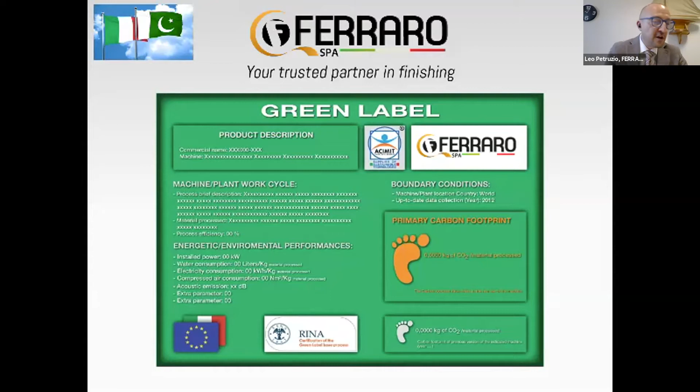Green label, this is related to the sustainable technology, and each of our machines is equipped with this label, which is stuck on the machine, and it reproduces the exact consumption of the utilities of the machine. And this label is certified by an international certification organization, which is RINA. All the data of this label are per kg of fabric. So any user of the machine can understand and calculate exactly the consumption of the machine for each kg of fabric.

We also have to take care about our quality certification. In fact, Ferraro is qualified and certified with ISO 9001, 14001, 18001. And we are very proud of this because it takes care of all our employees, the manufacturing, and the quality of the machines. Another point which is very, very important for us is the new Industry 4.0, which is the new challenge of manufacturing that includes the digitalization of all the data of the machine with the interconnection of the software in the companies.

Research and development, which is linked to the first point, which is innovation. We take a lot of care of research and development because we think we have to make continued innovation regarding the quality and the performances of the machines.

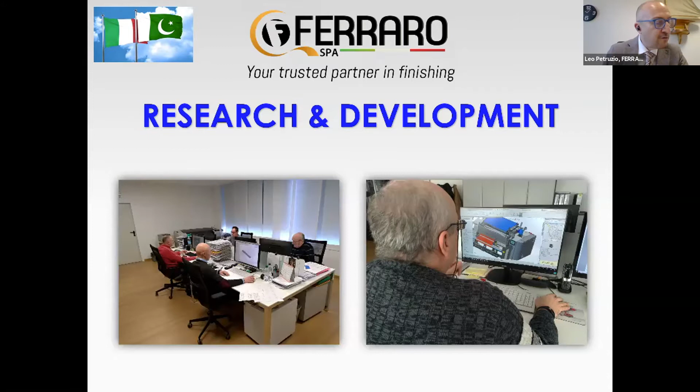The experience, this is another important point, one of the most important points, because the human capital, the human resource is the base. And you are young people, but I think that you always have to keep this in mind. The good success of a company is made mostly by human resources, by persons, by people. Any company can have all the money, all the instruments, all the tools, but without skill and good people, the company cannot grow.

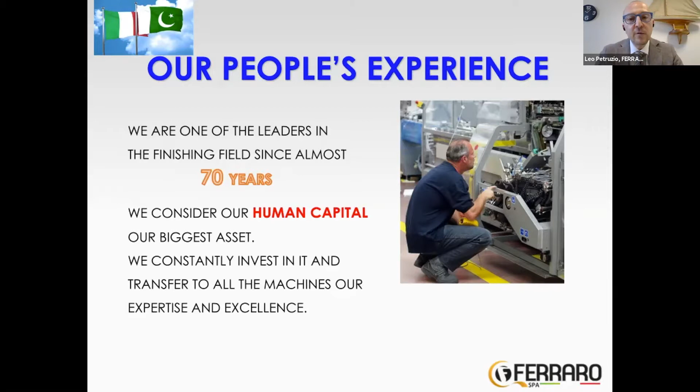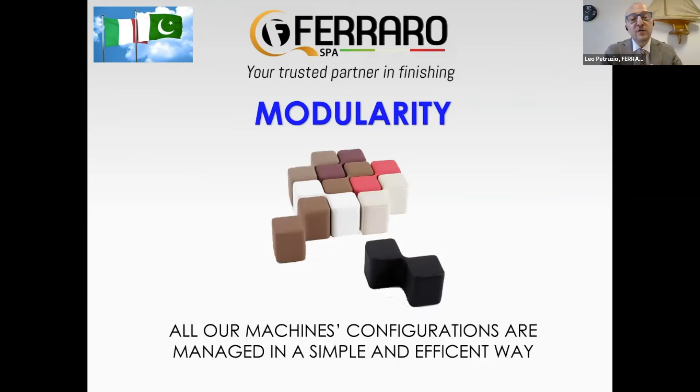Modularity, which is linked to a modern point of lean manufacturing, which is the research of production and manufacturing with high efficiency, low waste of material and of time, and better quality of the machines, but also of the life of people.

Another point which is very, very important is the after-sales service, because our target is never to leave customers unattended. This is a very important point, especially in this period of COVID, because our engineers cannot travel, or at least have a lot of restrictions in traveling. So this continuous communication between our service and customers is at the base of our success.

Our engineers team is constantly available to respond to all our customer needs. And we are also developing augmented reality software in order to let the customer attend the machine as it should be in our site.

Okay, let's start with the finishing machine. We started with the compactor, which is still our core business. The compactor is the last chain link of the textile process, because it's the last touch before making garments. The compactor gives a very good hand feel to the fabric, because the fabric is becoming a garment, and the garment has to be worn by us. And we need flexibility, we need softness, and we need also dimensional stability of the fabric, because the size we choose for our garment must be durable after a lot of washing.

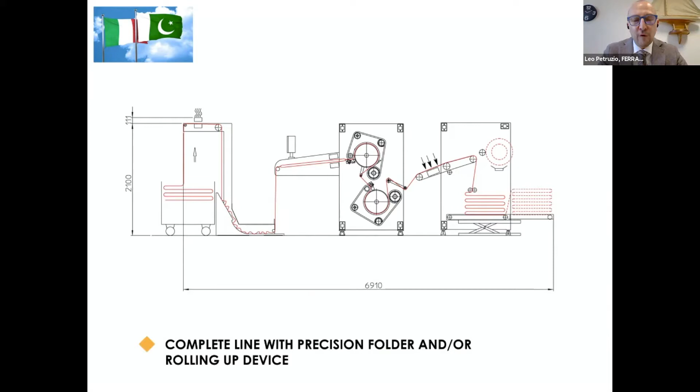An additional small module of our machine, and I would like to recall the concept of modularity, is the polishing cylinder, which you can see at the end of the compactor, that gives another effect to the fabric, which is a soft shining effect.

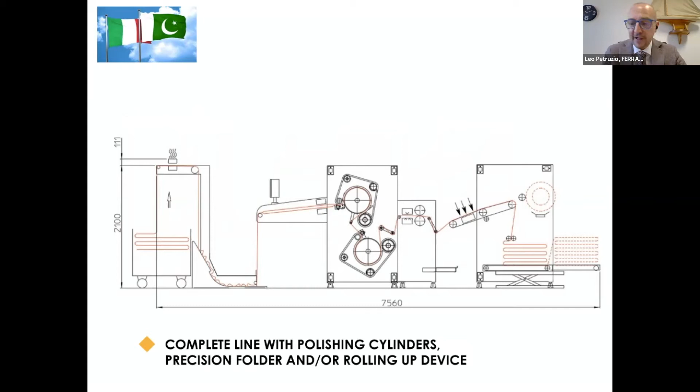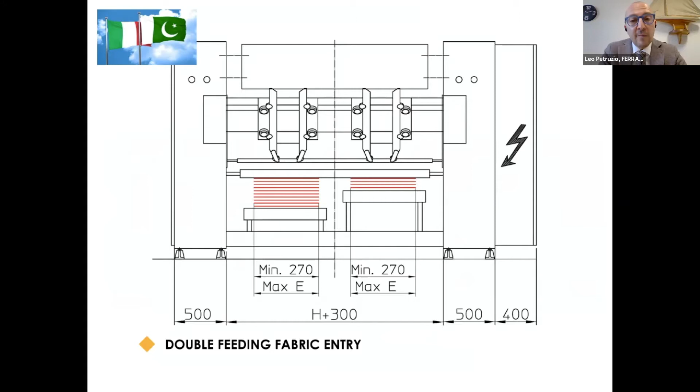We also developed a machine which works two lines of fabric completely independently. It means that in one machine we can process two different fabrics independently, and this is an efficient machine, because it can double the production with only one machine. I will show you the video of the machine.

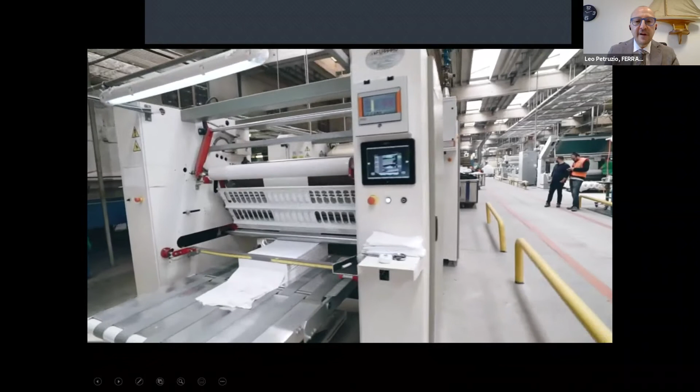This is the delivery with the precision plaiter. And this is the machine fully equipped. Spray system to humidify the fabric.

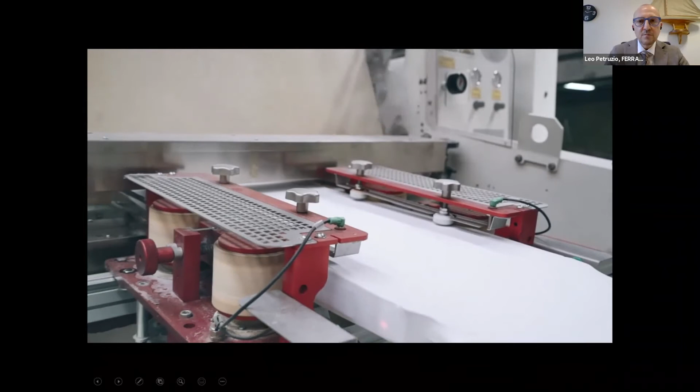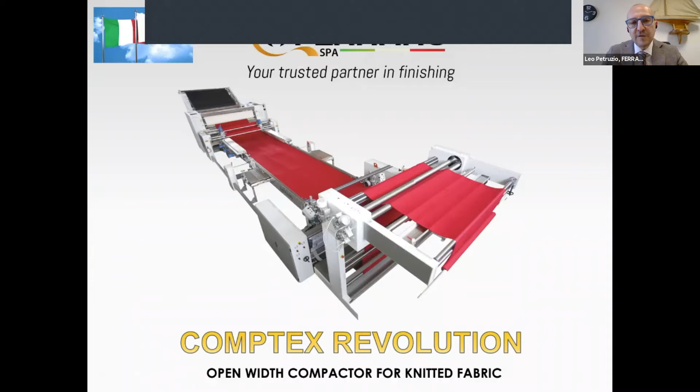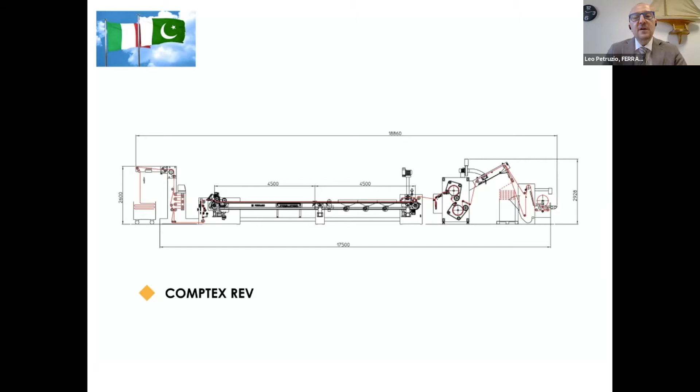Okay, the same machine is also manufactured for open width fabric. Many of our customers are not working only tubular fabric, but they slit the fabric and open it. For that reason, we also manufacture the machine for open width, which is exactly a felt compactor with all devices, including a weft straightener as an optional, and an open width compactor with the sanforizing machine between the pin chain and the felt compactor.

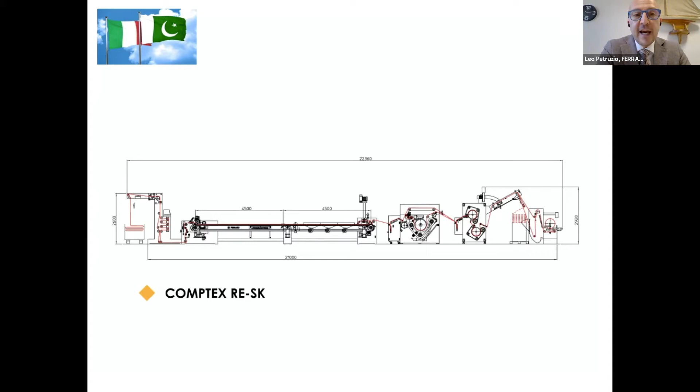This is a technology which improves the compression capability, so the stability of the fabric, and also improves a sort of silk and silicone touch effect on the fabric, which is very, very appreciated, especially on pigment printed fabric. The compactor machine, in some cases, can also be added at the exit of a stenter frame in order to have a full line of drying and compacting, calendering.

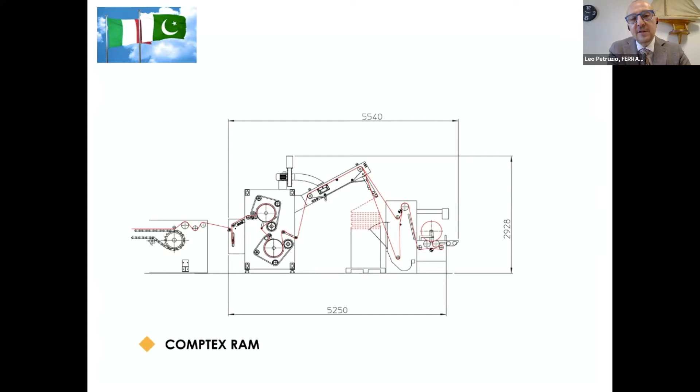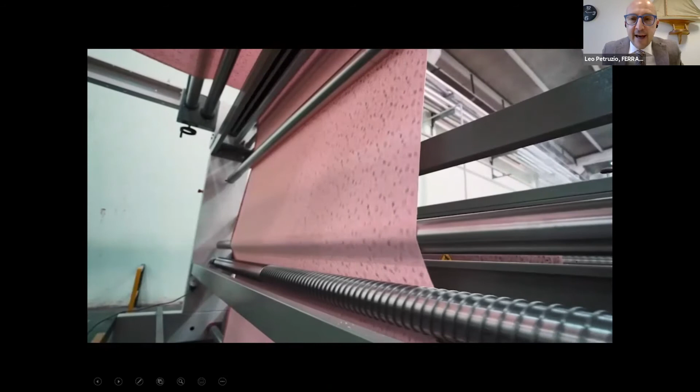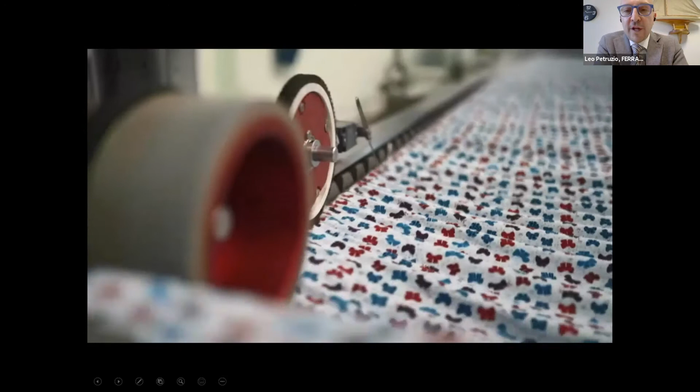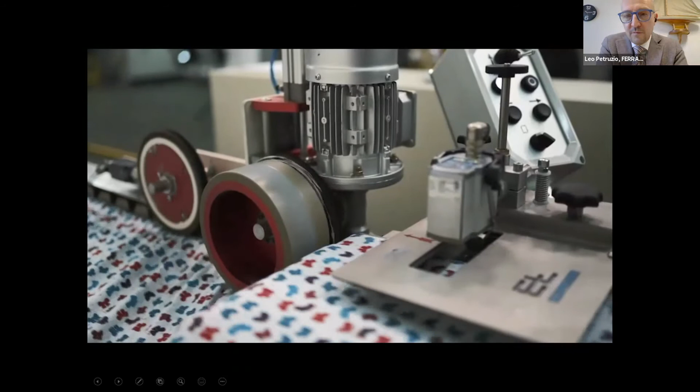This is the video of the open width compacting machine. It's a complete and complex machine. The length is about 20 meters and it has a 10-meter long pin chain, which is needed to open the fabric and stabilize exactly the size and the width of the fabric. We are using a computer which is linked to Industry 4.0, and all the data of the machine can be digitalized. This is the sanforizing machine with the rubber.

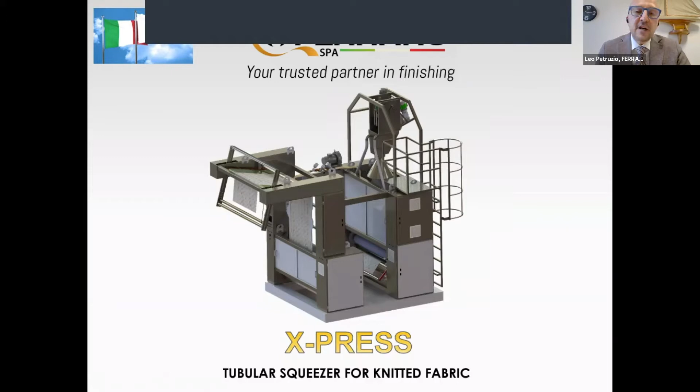Okay, for several years, in order to have good performance of a compacting machine, we started manufacturing also tubular squeezers and slitting machines, which work on wet fabric just after the dyeing machine and before dryers or stenter frames.

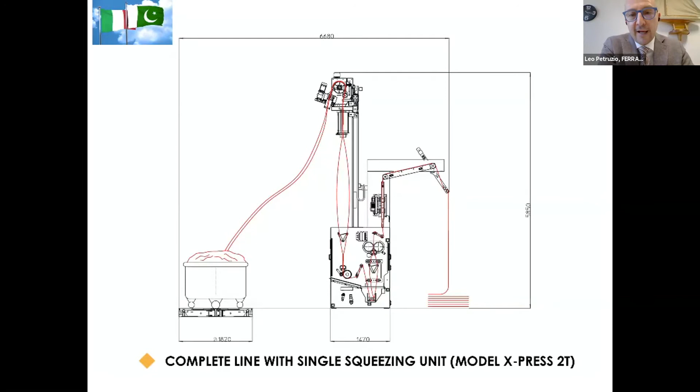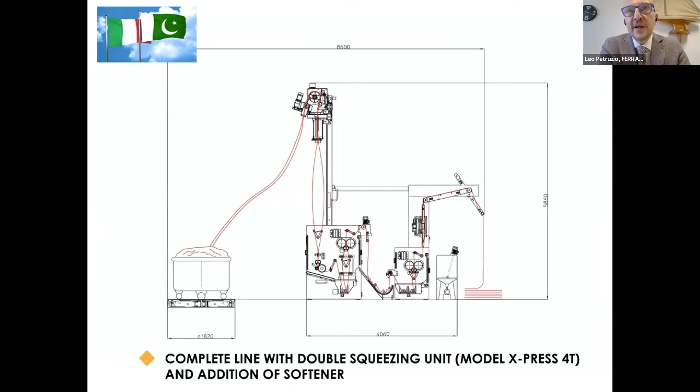This is the tubular balloon squeezer, which can be single, like this one, from the trolley of the dyed fabric, which is wet. It can be detwisted from rope to the balloon and then squeezed and opened, then plaited just to let the fabric go into the dryers. Or double, including two padders. The first one is for dewatering, and the second one is to apply the softener to the fabric.

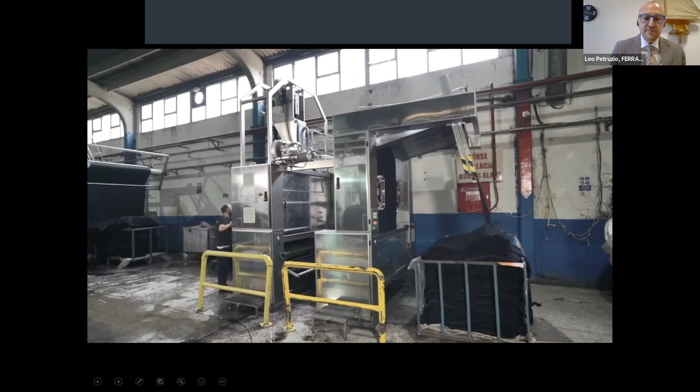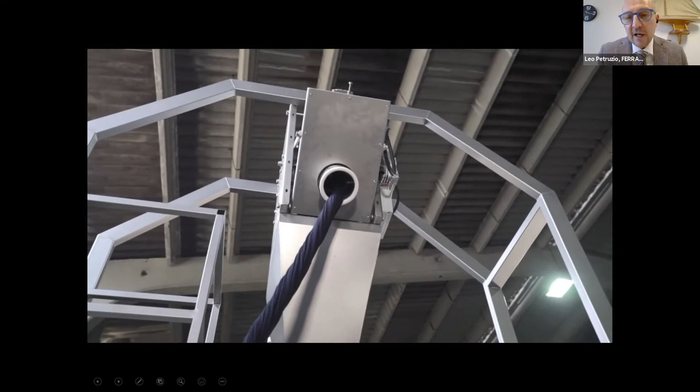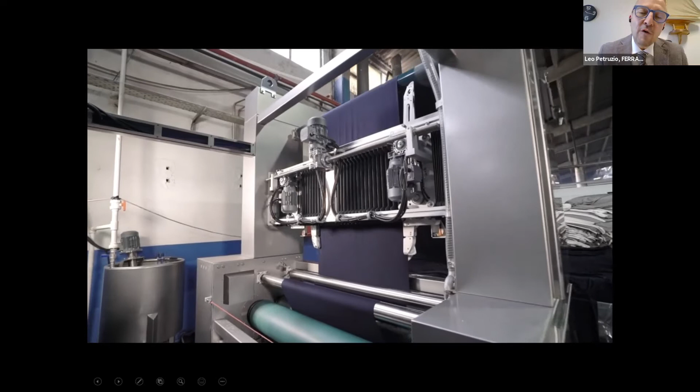This is the balloon squeezer. It is totally in stainless steel and recalls the concept of quality, because being a machine for wet fabric, we must design for durability and long life. So it is totally made of stainless steel. This is the padder, and we developed a particular rubber compound which is called Ferragum, and it gives a very strong squeezing effect, releasing only 55–60% of water.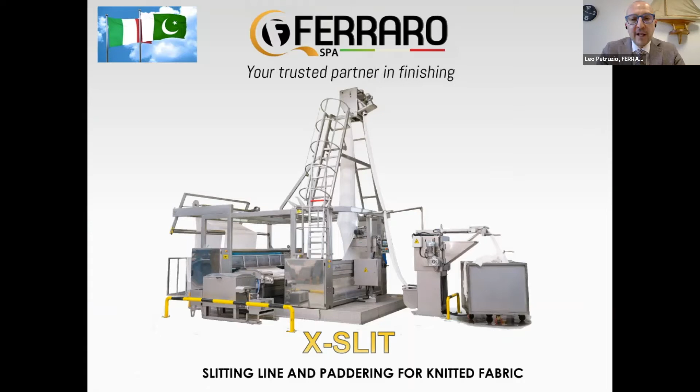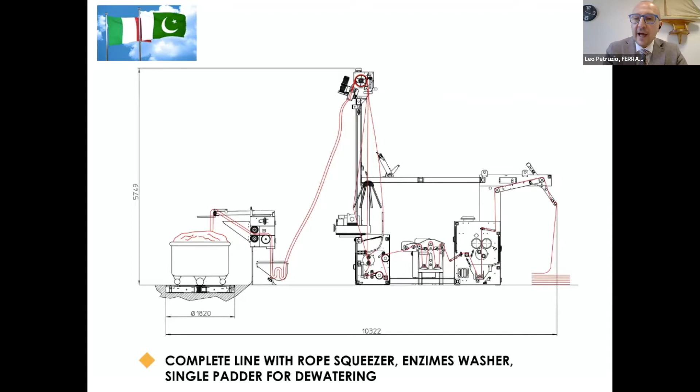The same concept applies to the slitting line, which transforms the fabric from tubular, opening and squeezing it. It is a machine with a rope squeezer, twister, opening basket with cutting, and an enzyme washing tank to remove all enzyme residual from the fabric, plus a padder to squeeze the fabric and remove the major quantity of water. This is single, but can also have two padders with the same concept as the tubular squeezer, one for dewatering and the second for softener application.

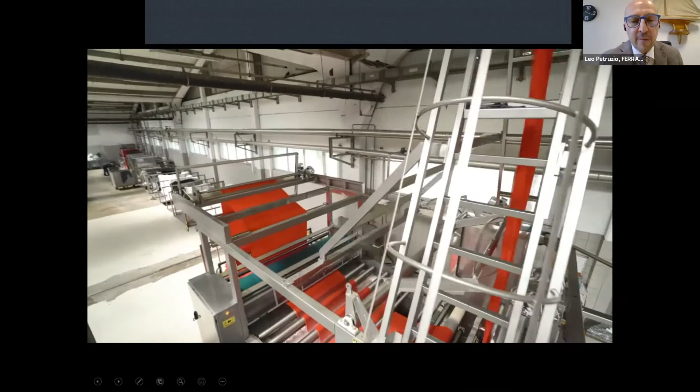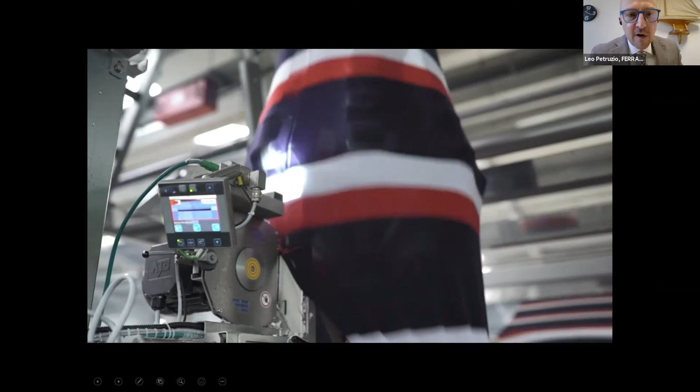I will show you a small video of the slitting line. This machine is for wet fabric, so it is totally made of stainless steel. Also in this case, the rubber compound for squeezing that we use is our patented Fair Gum technology. This is the basket to cut and open the fabric, and this is the enzyme washing machine with a filter.

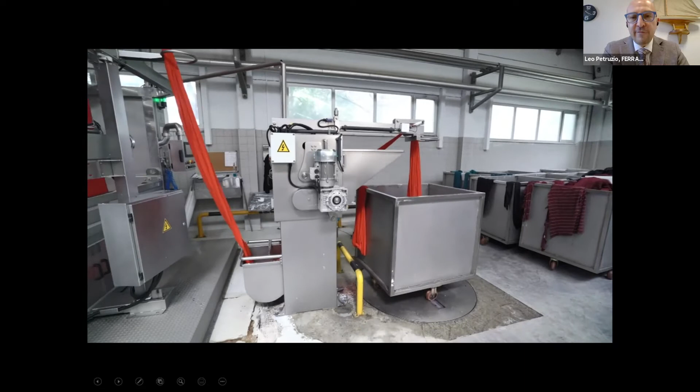The machine can also be used from rope fabric to open fabric. This is called rope opener and squeezer. This is the filter to filter the water from the residual, especially the enzyme residual, for cotton and blending.

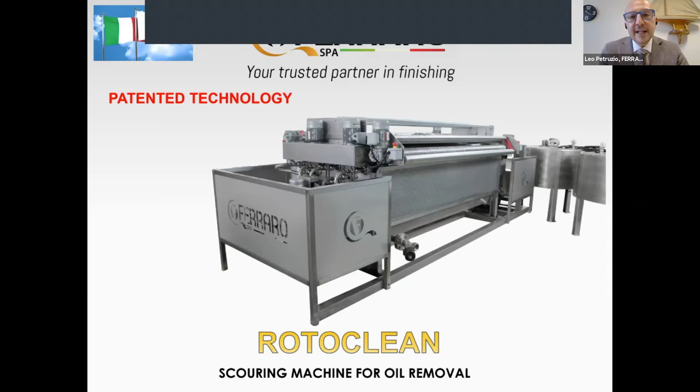Now we pass to a new technology, which is RotoClean, a scouring machine for oil removal. It started from the idea of washing the fabric and removing the oil, but without wasting water. This is again linked to sustainable technology. It is a machine linked to a stenter frame, just in the process of heat setting, removing the knitting oil from the fabric just before the heat set procedure.

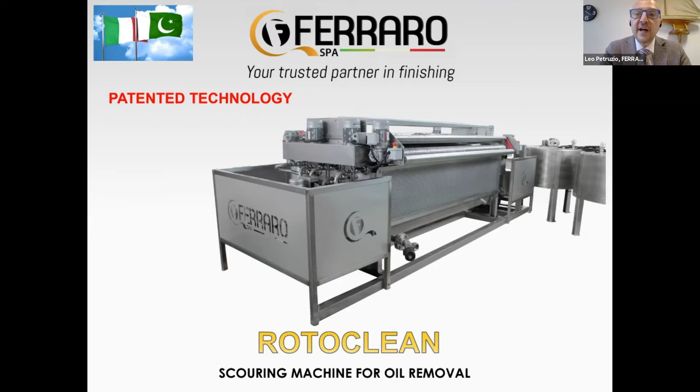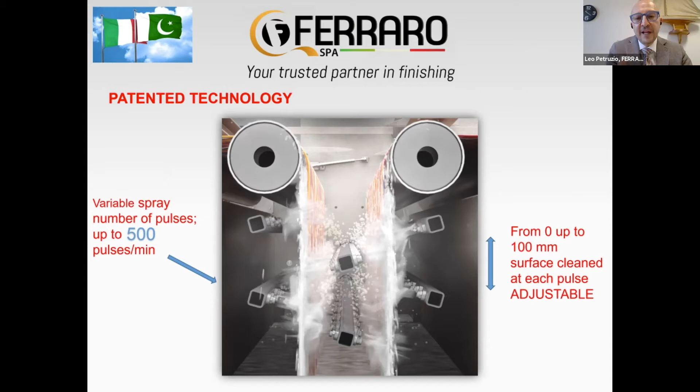It's a machine with a patented technology using vibration of nozzles, which can make 500 pulses per minute, increasing the washing efficiency and capacity 8 times compared to a fixed nozzle machine. It is linked, as mentioned, at the inlet of a stenter frame just before the foulard or padder, or in between two padders, like this one. I will show you a video which is self-explanatory about our patented pulse movement.

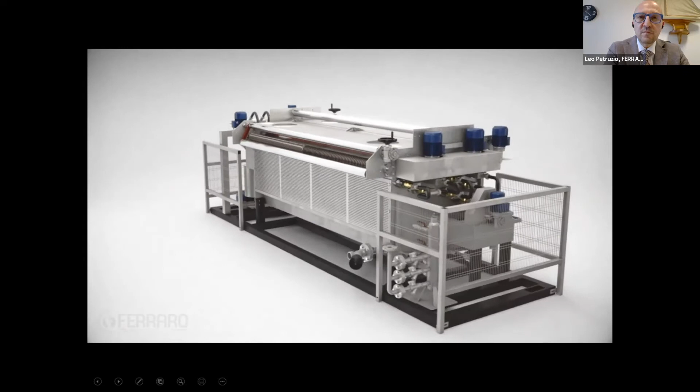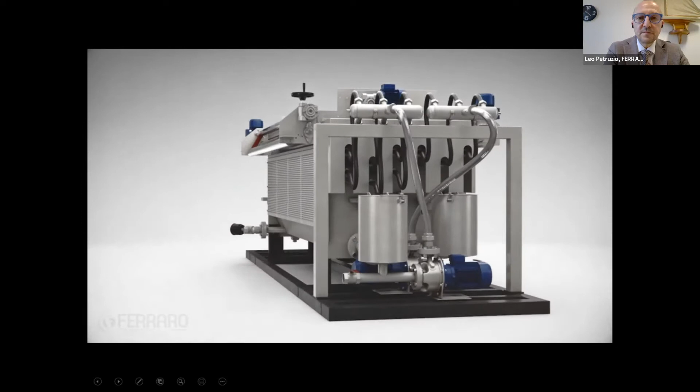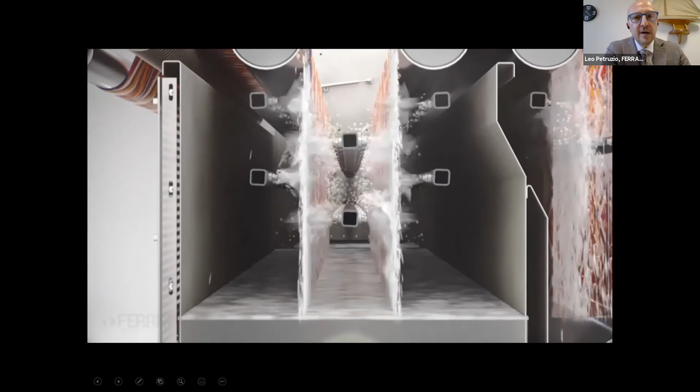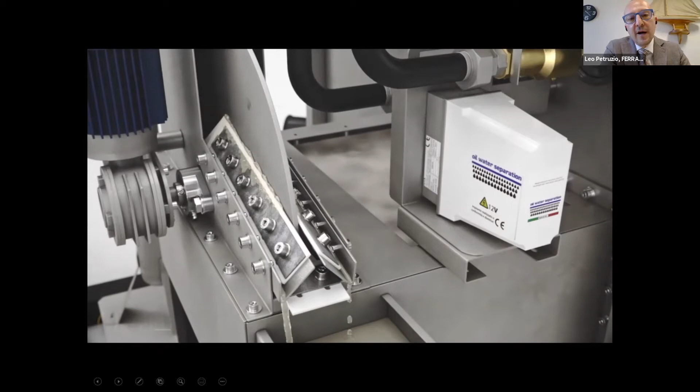The oscillation of the nozzles makes a sort of brush on the fabric with water and chemical, which is a special sustainable chemical that separates the oil from the fabric. The oil is filtered on this filter and totally separated from the water.

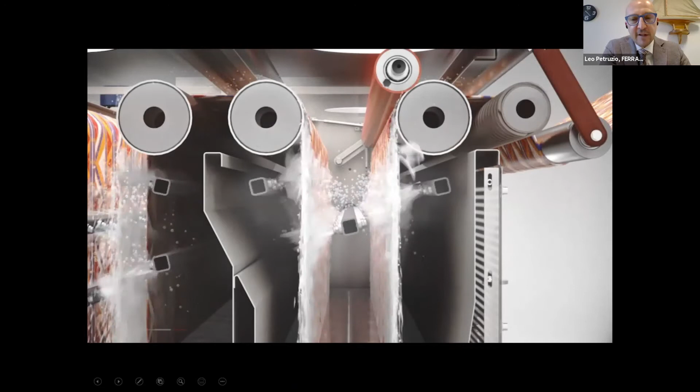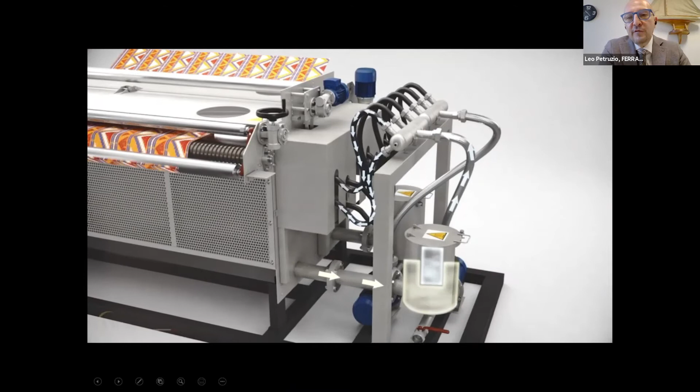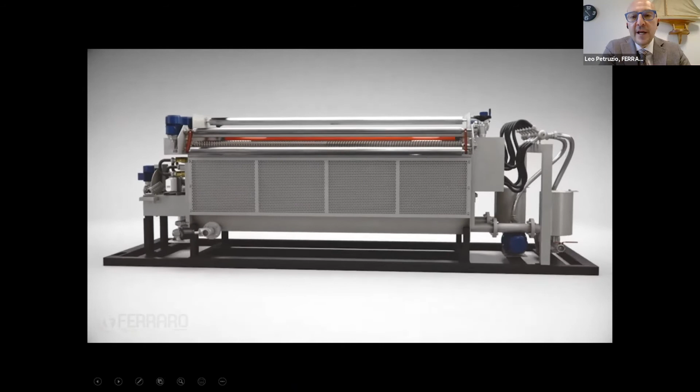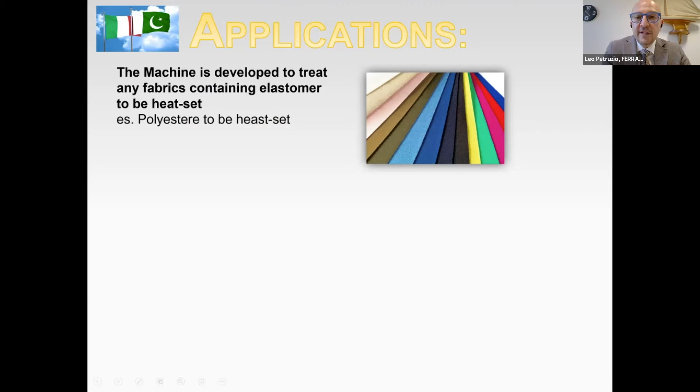This is the filter, and the water involved is totally recycled. You can see the flow now: it comes from the bottom, gets filtered, and is pumped again to the nozzle, then recycled again. So the total water consumption is only the water remaining on the fabric. There is no waste, and the detergent we are using is a totally ecological detergent.

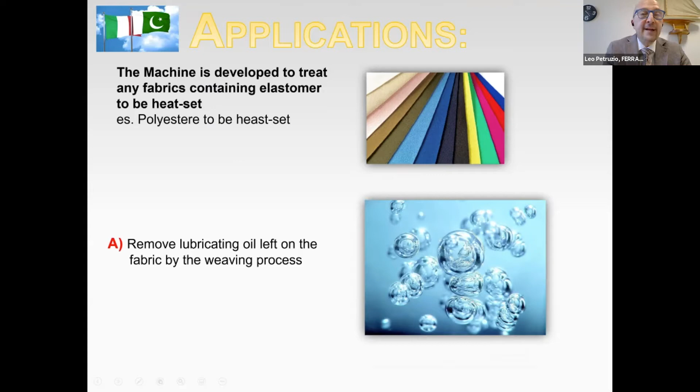This is the concept: remove lubricating oil left on the fabric by the weaving and knitting process. This is the product we are suggesting, which is totally ecological. This is the feature of the product, and it has a very short impact on the environment.

I would like to close with the part I mentioned at the beginning: sustainable technology and green label. Thank you very much for your attention. I hope to see you soon in person at the companies, to share opinions with you. Thank you very much.

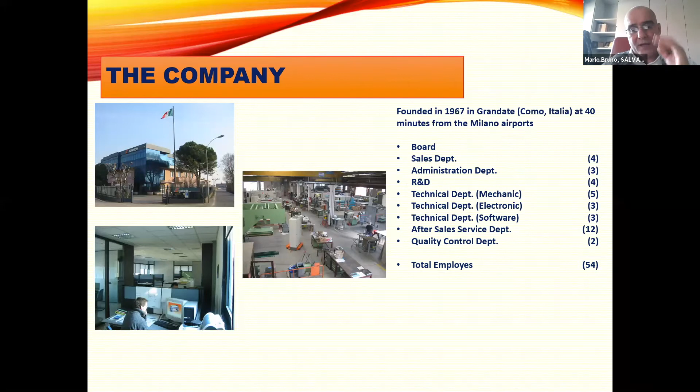Like all Italian companies, as Leo said a few minutes ago, we concentrate on one sector of the production chain of a fabric in order to be specialized, and specifically we dedicate all day on these issues. I want to focus on point number two, because in my opinion it's very important. What differentiates Italian machinery producers from everybody else is that we still have in our country a quite big and super high level market. Our customers, the ones we are challenging with, are asking every day to develop machines - they work on a niche market, on the fashion market, on the top level with new fibers, new fabric structures, and we have to satisfy them. So it's a challenge day by day.

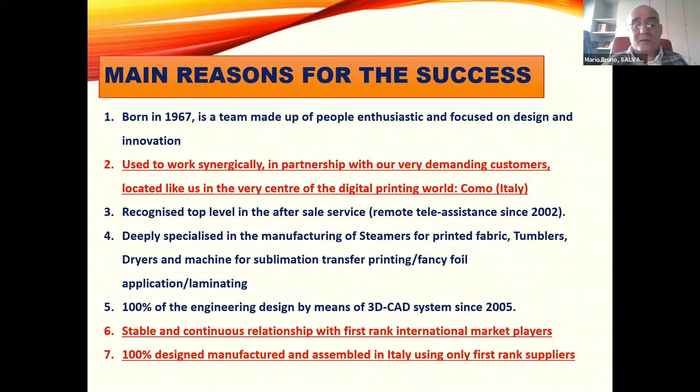As I say here, point number two: we work synergically in partnership with our very demanding customers located nearby. We are in the Como area, and around a few kilometers we have super high level customers in silk, woven, wool, but especially in cotton, viscose, polyester. So that is very important, I think.

So the machine I'm going to present - is it a tumbler or a dryer? Actually, it's both. It is a tumbler, a chamber of tumbler, but included in a shell of a dryer.

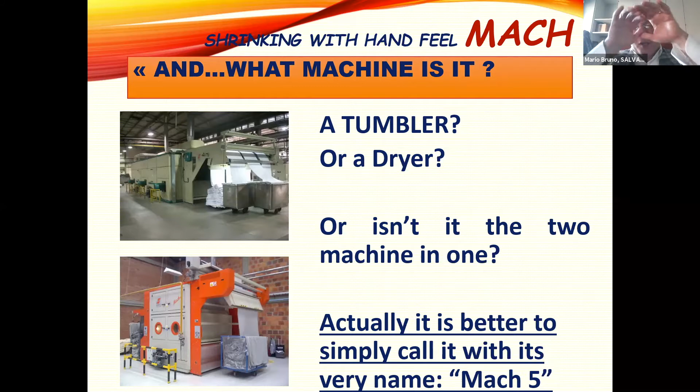Here you have two pictures showing the difference of the behavior of the fabric inside of a tumbler dryer, where the fabric goes back and forward in a tunnel and then hits two grids on the back side and front side of the fabric, and it can hit at different speed or different temperature with different inclination. So there are a lot of parameters you can modify, you can enable, in order to have different effects on the fabric.

This is what happens on the fabric in a typical tensionless dryer, where the fabric takes an S shape along the whole circuit. You see immediately that the mechanical action you can apply on the fabric is much less than a tumbler dryer. That's why the efficiency in terms of drying, hand feel, and shrinkage is more than the typical tensionless dryer that we still produce anyway.

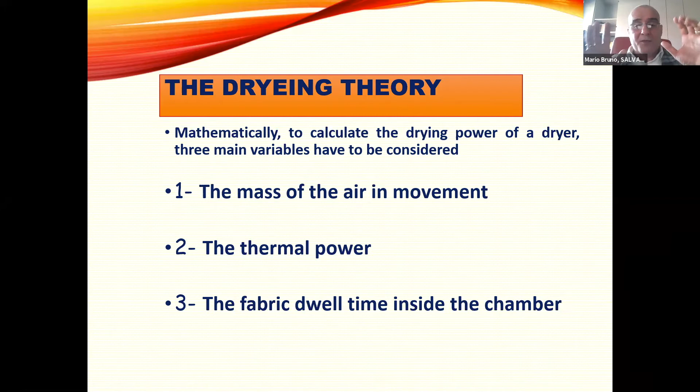I'm talking about the drying theory now. In mathematics, to calculate the drying power of a dryer, three main variables have to be considered: the mass of air in movement, the thermal power that you apply, and the fabric dwell time inside of the chamber.

This is a typical picture - don't laugh, but it's a picture of one of our cities in the south of Italy, where people are used to put the cloth outside of the window. This is important because it shows one of the concepts that for us is very important: the wind is much more powerful than the temperature. So a big quantity of air inside of the dryer is much better than having a high temperature.

We are located in the north of Italy, and we face many months with a temperature no more than 10 degrees. I can tell you that you can dry faster on a 10 Celsius degree day outside of a window if there is a lot of wind, than what happens in July or August, where we have 35 to 40 degrees but there's no wind.

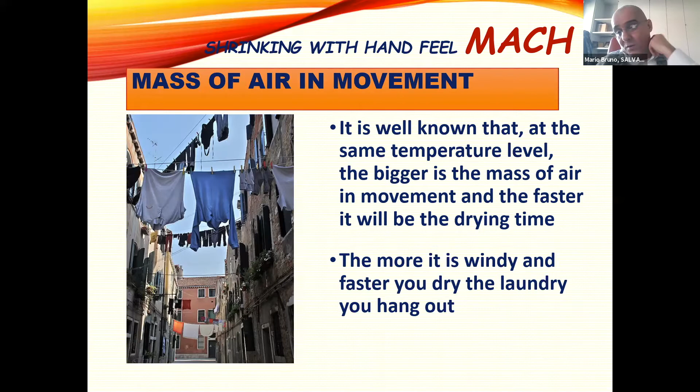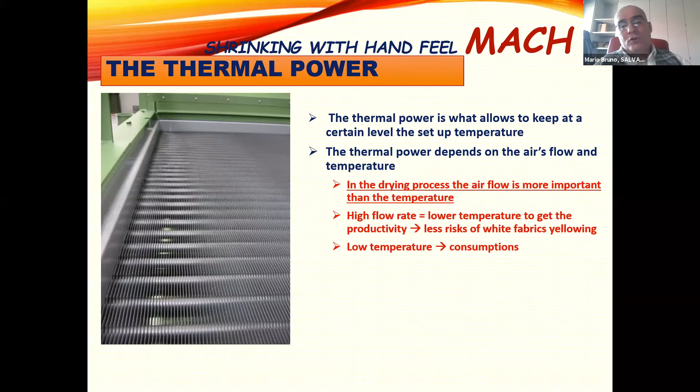So the mass of air is very important in this, we focus our machine on this. The thermal power is what you have to apply in order to keep the temperature inside of the chamber. The thermal power depends on the mass of air that you move and the delta temperature of this mass of air. So the more air you have, and the lower you can keep the temperature, which also reflects on the cost and the consumption.

The dwell time is the third point. The more you stay inside of a chamber, the more efficient you are. In a conventional dryer, like a stenter frame or a tensionless dryer, the fabric goes inside, goes out, just along the total length of the machine. But in a tumbler dryer, the fabric goes back and forward on two different chambers, and the more time you stay inside, the more efficient you are.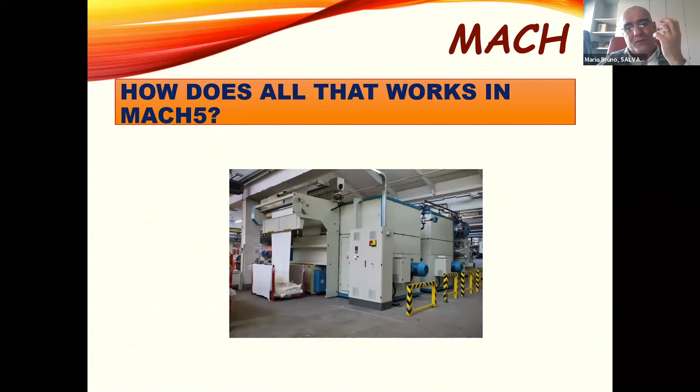So how does our Mach 5 work? We call it Mach 5, the machine. Mach, the Mach number, is the number that determines the speed of sound. So it gives you the idea of the power of this machine.

This is a point that sometimes is difficult for me to make people understand, that you can use the power of your motor in two different ways. It depends on the propeller shape that you use.

Mandatory for the knit goods is the gentleness of the flow. So we use a helicocentrifugal propeller. What does it mean, helicocentrifugal propeller? It's a propeller where the blades are quite wide, wider than a pure centrifugal propeller, which means that you move a huge quantity of air, but you don't create a big pressure.

We don't need any big pressure in our machine because our circuit is very short, it's 1.2 meters. We don't need to send the fabric from one chamber 12 meters to the second one. So all the power we have in our motor, we dedicate to create a huge quantity of air, 40,000 cubic meters of air per hour.

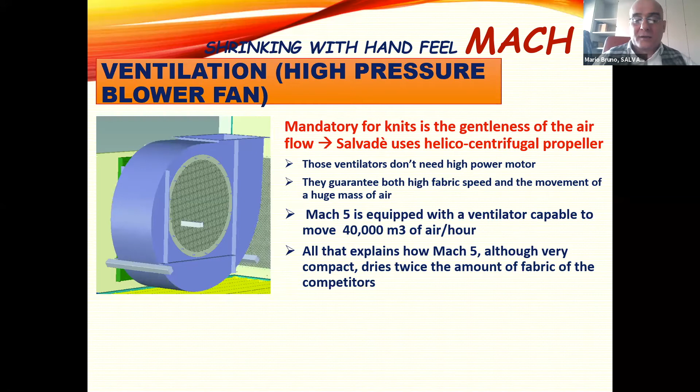All this explains why we can keep the temperature low. Normally our customers work heated around 120, 130, maximum 135 Celsius degrees.

This instead is a typical propeller used by people that need to shake the fabric strongly against the grids. This ventilator is typically a pure centrifugal propeller and is suitable only for woven fabrics. This type of propeller has very narrow blades and permits a high rotation speed, therefore high pressure and low flow rate.

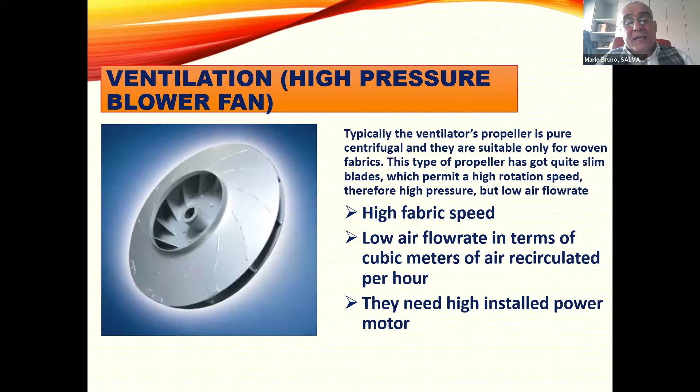So you have a high fabric speed, low flow rate in terms of cubic meters, and you need a huge installed power to make them work.

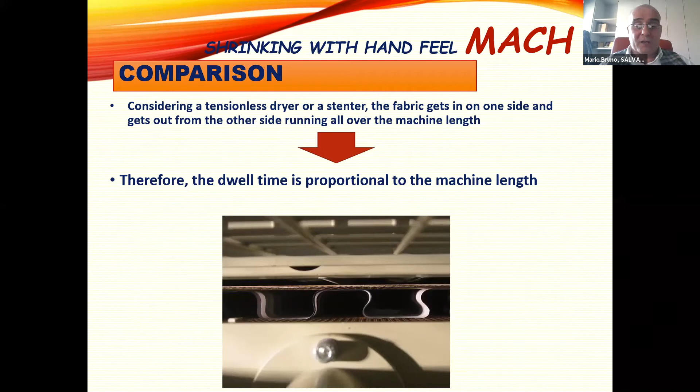This is our historical tensionless dryer that we've manufactured for already 53 years. This is how the fabric appears inside of this machine, and this is instead what happens in a tumbler dryer.

You see, this is exactly our circuit. To go from one basket to the other, the length of the tube is 1.2 meters, very short. That's why it's for knitted fabrics, you can put whatever knitted you want, even viscose, even rayon, even man-made fabric, which is even more difficult than cotton.

This is very important in terms of productivity, because the fabric gets inside the machine at the same speed as whatever dryer, but the air moves at 40 meters a second in the Mach 5, which is double every conventional dryer. Thanks to this way of working, the fabric dwell time is 4 times longer than in a conventional dryer.

Mach 5 can contain 70 to 80 meters of fabric versus a maximum of 20 meters in a conventional dryer, about 3.5 times more, which means Mach 5, even considering only productiveness, can perform about 15 times more than a conventional dryer.

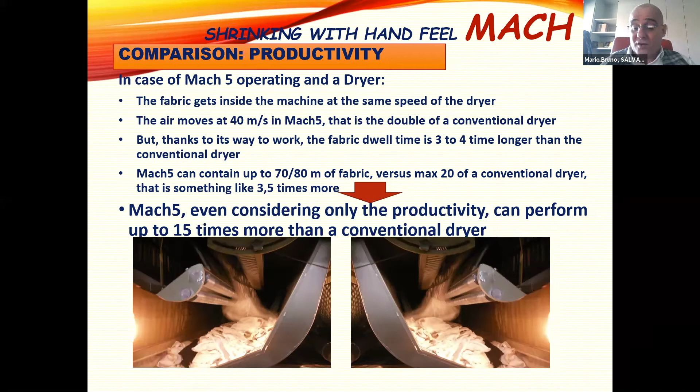One other important tip for knitting people, you know this. When you open, like Leo showed before in their machine, when you slit and open a tubular knit, what you have is the selvage curling problems. This is a huge problem, especially when you have a lot of lycra before the thermal fixation inside of the fabric. So the selvage starts to curl.

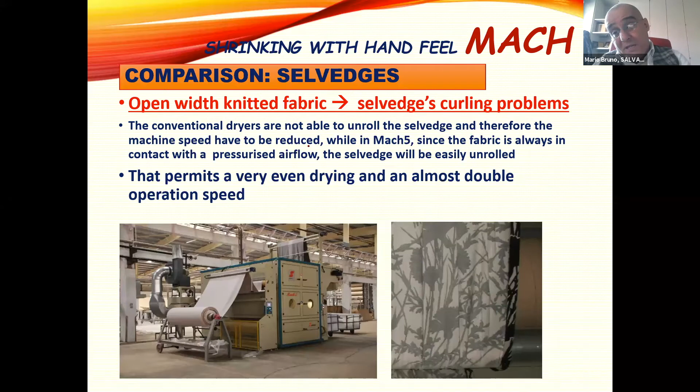In a typical conventional tensionless dryer, you don't have any chance because it's not a stenter frame. You don't have any pinning. So there is no question, you have curling of the selvage during the drying, so it is more difficult to dry. Instead, on a Mach 5 tumbler dryer, the fabric is continuously in contact with a big mass of air, and the selvage will be made flat. So you can improve the speed, so you can improve the production.

This is another application of our machine. You can see on the back a continuous washing range. It's a rope form continuous washing range, quite huge. You have a lot of them in Pakistan, sold by two other Italian manufacturers, which are MCS and Mezzera. And we have a lot of them around the world. They have a dryer inline. Inline you have our tumbler dryer.

What does this mean? If you can put a tumbler dryer in line with a long and big washing range, it gives you the idea of the drying capability of this machine. Normally you don't find a tumble dryer in line with washing ranges, but in our case we did it. We have many of them.

Let me talk now about one innovation that we launched at the last ITMA. Unfortunately, the COVID situation did not permit us to spread this explanation all over the world, because just after the ITMA, you remember, in a few months we fell into this particular situation that everybody hopes finishes soon. Anyway, the Shrinkage, an innovative drying shrinking solution.

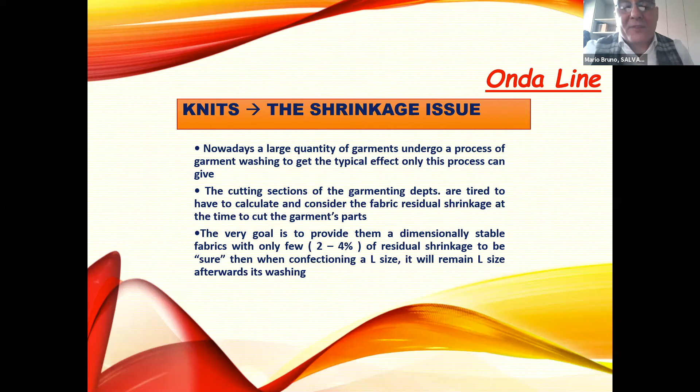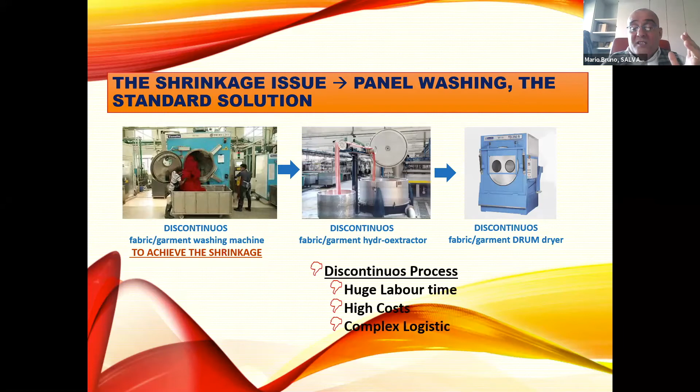So this is a picture that shows what happens in the fabric when you shrink it. And this is the standard solution that you normally have. I saw it personally at a couple of customers in Pakistan, where people do a discontinuous fabric garment washing to achieve the shrinkage. Then they pass the fabric to a centrifuge in order to hydroextract, and then they go to the discontinuous drum dryer. So it is easy to understand that this is a discontinuous process. You have huge labor time, high costs, and complex logistics. Lots of people are working on everything.

So what we launched at ITMA was the Shrinkage, a continuous process solution. We put inline here a tank full of water where you have continuous wetting, and that is where you achieve the shrinkage. That's why we call it Onda. Onda in Italian means waves. So the fabric is always in wave shapes in order to avoid any elongation. So here in this Onda wet tank, the fabric is in wave shapes, and then it goes to a tensionless dryer in order to be pre-dried.

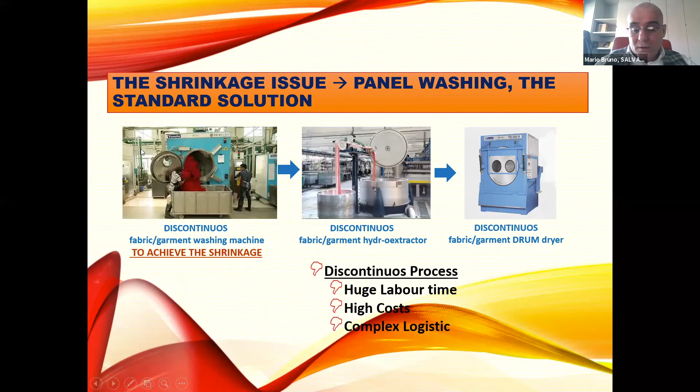This part is a continuous hydroextractor, so it does the job of the discontinuous one, but in a continuous way. When you take out about 50% of the water, you go to the finishing continuous tumble dryer, tensionless. And then you go up again with the conveyor belt. So you have the whole line with no tension, but it's continuous. So we convert the discontinuous process into a continuous process. Look at that.

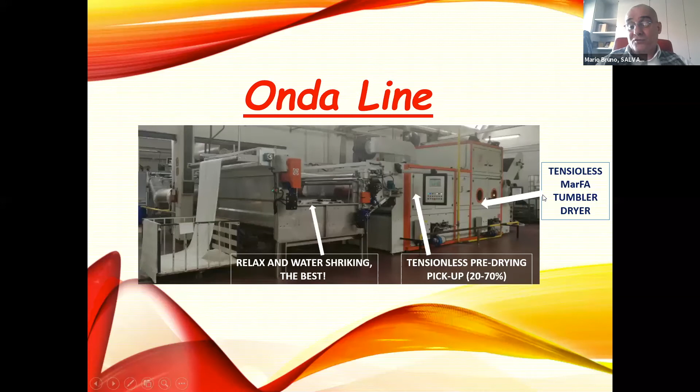So here we have relaxed water shrinkage, which is the best. Everybody knows there is no better medium to shrink a fabric than water. So you shrink in the water, then you pre-dry here in a tensionless dryer, and then you go straight into the tensionless tumble dryer to give the end feel, the final shrinkage, and the final drying. So here is the fabric appearance.

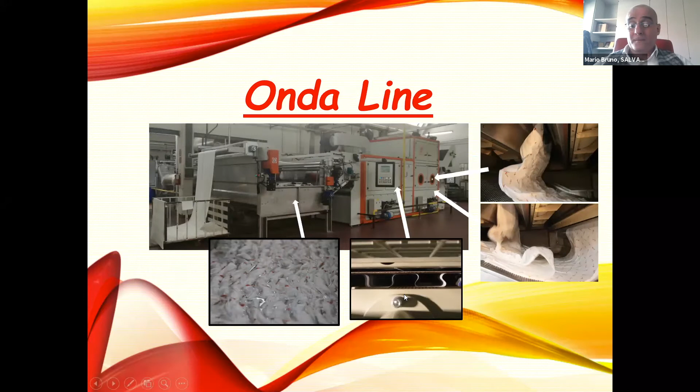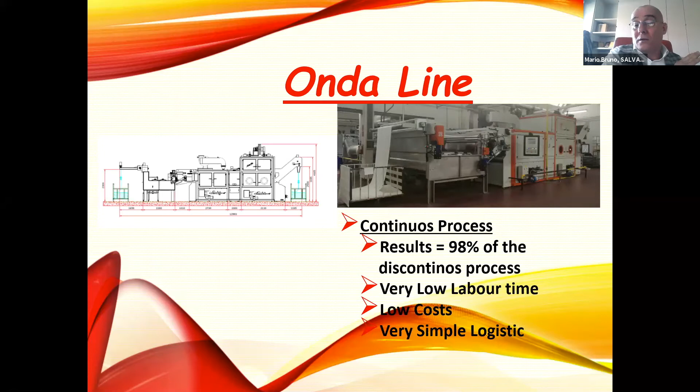Inside this chamber, the fabric is in this condition, floating on the water, compact in waves, no elongation. Then you go to the tensionless dryer. Again, the fabric is in an S shape, wave shape, no tension. And then finally, you finish in the tensionless tumbler dryer. So this is the line. A continuous process, with a result of about 98% of what you achieve in the standard one. Very low labor time, low cost, and very simple logistics.

That's all. So, just to summarize, two main concepts in this presentation: the value of a huge quantity of air included in a shell without any dissipation of heat, and the other one is that I shrink the fabric in a continuous instead of a discontinuous way. These are the two main concepts.